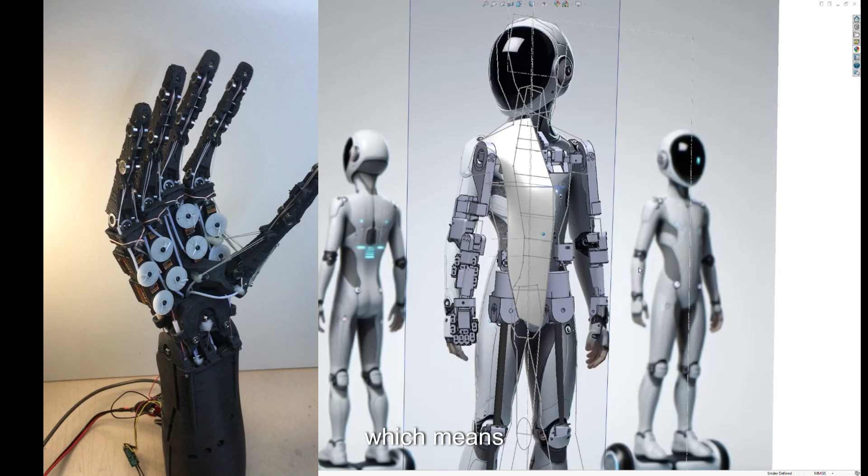HOPELite, which will be an open source humanoid with semi-dexterous hands, which means 16 degrees of freedom spread across 4 fingers and a thumb. It's not quite enough to achieve human level dexterity. You need probably another, possibly even 8 or 9 actually, if you really get into the thumb. And you could have a couple more for the wrist as well.

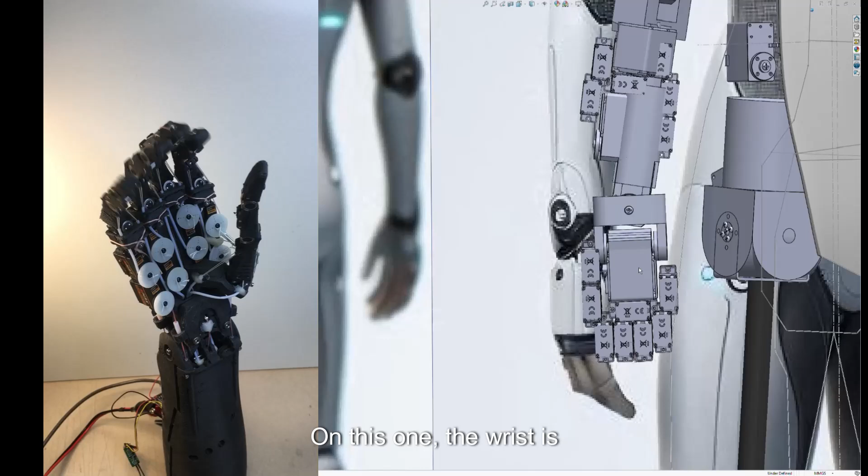On this one, the wrist is direct drive. That's yaw, that's pitch, that's rotation, that's elbow, that's humeral rotation, and up here you've got pitch and yaw. So it's 7 degrees in the arm if you include the wrist, and then 16 in the hand. And that's enough for mobile manipulation.

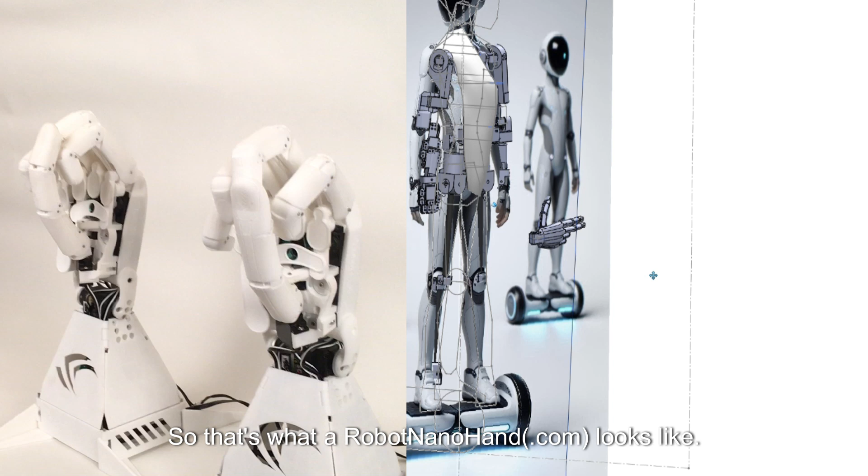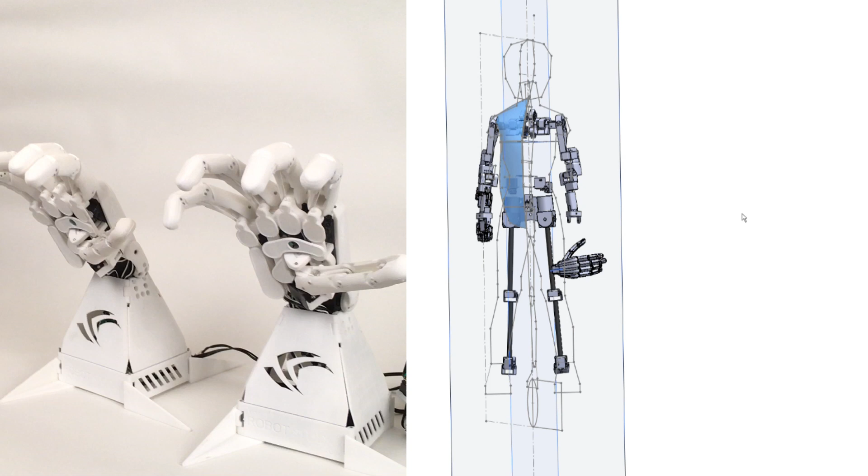Let's just delete it. I did have one of the RobotNanoHands on here. It's a bit big. Let me show you what that looks like. So that's what a RobotNanoHand looks like. So I'll get rid of the artwork while I pop this on. So that's the guts of the robot as it stands.

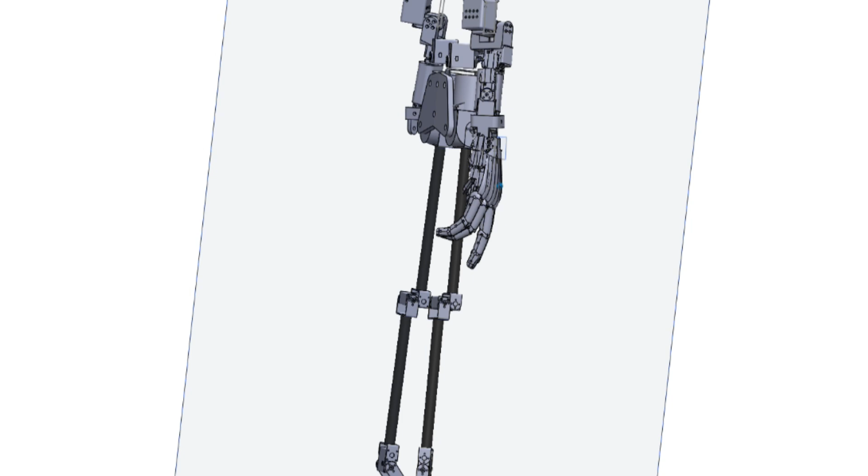Plenty of detail work to go, of course, but at this stage I'm just making sure that things can fit, and then you kind of have to trust that when you come to turn it into high detail, it all still fits. So assumptions are made, and the trick is that they not be fatal when you get to the end.

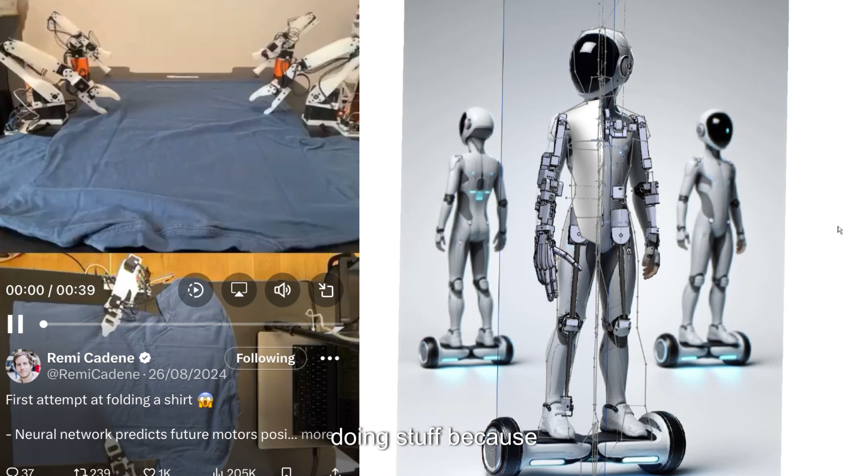So that's a RobotNanoHand. There we are. And you can see how out of scale that would be, which is not a killer. If I run out of time, I could go back to it, but I really want this thing to be capable. So 16 degrees of freedom in the hand alone, fingers and thumb. That should make it capable of doing stuff, because it has to be able to do stuff, otherwise what's the point of it? And yes, one day it'll step off the hoverboard. For now though, it'll all be integrated.

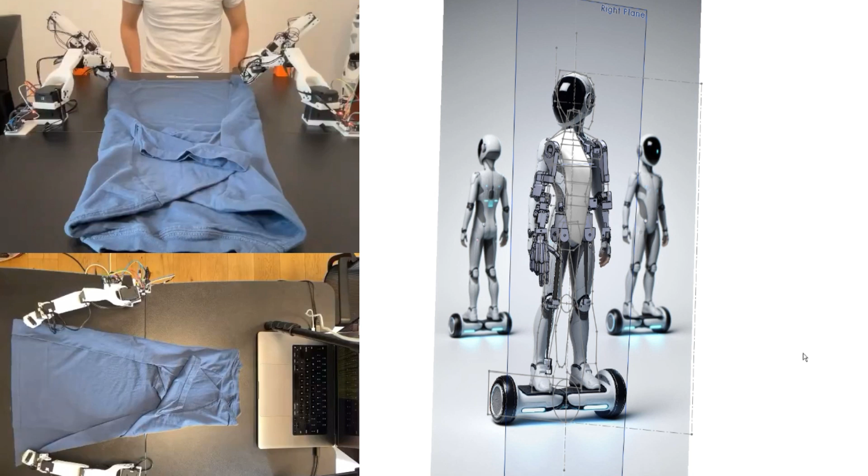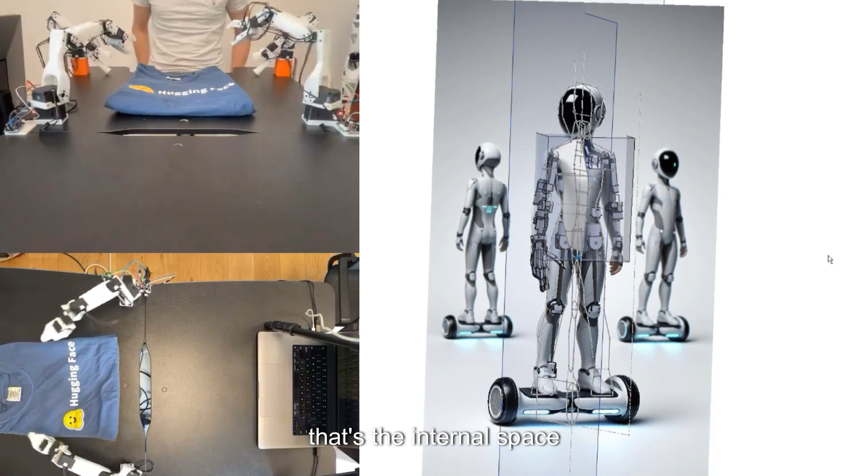And the other constraint is I want it to fit in standard walk-on aircraft cabin luggage. So when it's all folded up, that is the internal space. It has to fold down and fit inside that. I'm not 100% convinced it'll do it when it's got the outers on. And particularly the helmet's going to be an issue, so the helmet might have to go separate, unless it can be made to fold down. But that's a lot of work, so we shall see how we get on with that. But the rest of it can fold down and will fit inside that volume.

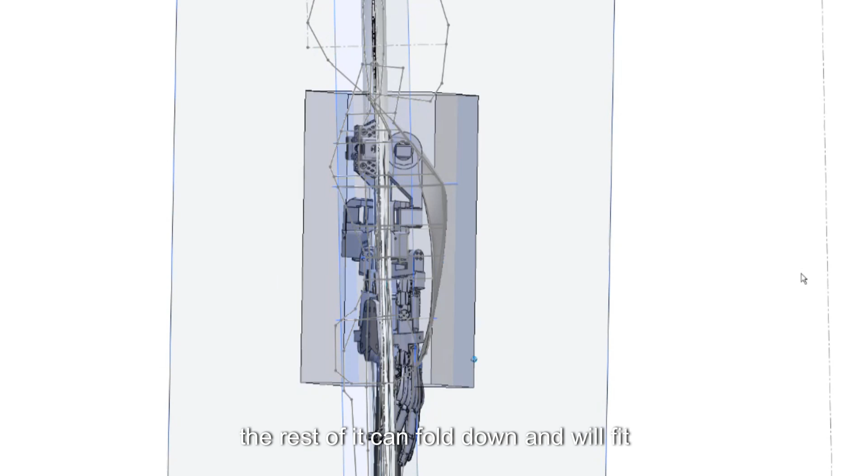And that's important to make it easy to use, easy to show, easy to transport. The aim is you just unzip the suitcase, it pops out, it turns on, it stands up, and it starts talking to people and doing stuff. That's what we're after. This is a direct derivation of the standard open arm, which is fully published now. So this will be released mid-December.

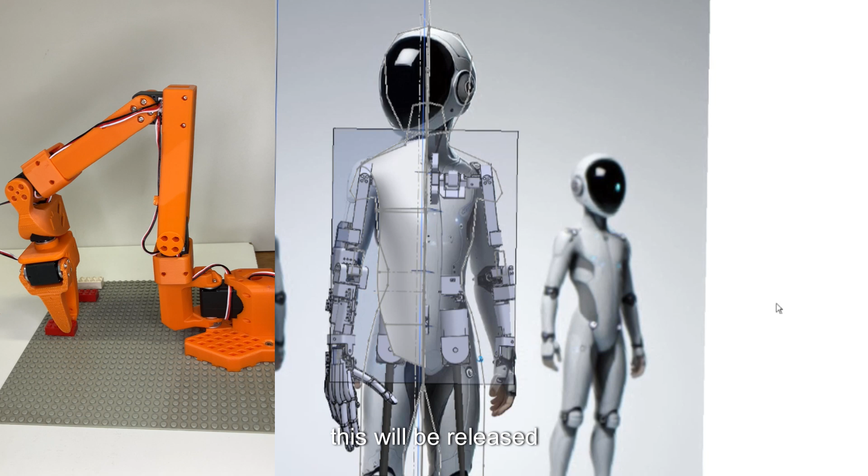And by released I mean that there's a fully working prototype, with the caveat that I don't know how much of the software will be running. My goal is to get it to the point where it's easy to put software on it and start to get it to do stuff, and that with very little underlying knowledge of why you've done things a certain way, you can keep it running. That is the aim. Build it, keep it running, experiment on it. And I think it can be done for under £2,000. So that's exciting.

So that is what I am working on at the moment. A derivation of a standard open arm, a reworking of the robot nano hand kind of crossed with the Dex hand, semi-dexterous capability. So it's actually a brand new hand when you think about it. I said I wouldn't, but I am, obviously, because that's what I like doing. I am designing the HOPELite hand to go on this robot. Semi-dexterous, 16 degrees of freedom across 4 fingers and a thumb, so you can use direct video imaging for training. Capable of picking stuff up, doing things.

You need to add some kind of sensorization to it as well, some kind of force feedback. A simple one, I think, will be that the last 2 segments of the finger will just be sprung loaded and measure that displacement, and then possibly fit a camera over some coloured gel to get texture. There's a lot of stuff you can do very cheaply now. So emphasis is on low cost, ease of assembly, cable clearances, ease of printing, ease of maintenance, transportability, coolness. It's going to look good. And it can look like anything as well, actually.

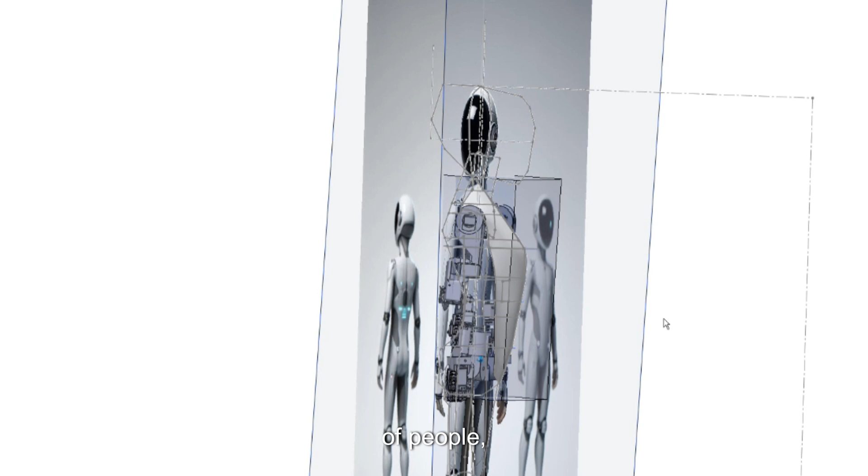In the full implementation, the geometry will link automatically to a Gen AI 3D model generator, so you can make it look like anything, and it will fit on top. That's the goal with this one. Oh, and the personality which ends up inhabiting this robot will know how to teach you how to build it. This, then eventually more things. An AI linked to a community of people who want to go and build wonderful robots and make the world a lovely place.